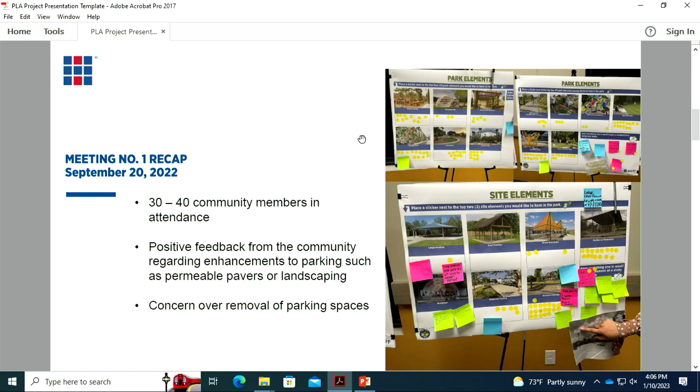The intent was for members of the community to come place a dot, which you see some of the yellow dots on those images, for the programming and the site elements that they favored the most. And we compiled all that information and included that into the concepts. So our first engagement meeting was September 20th. There was an overwhelming desire to maintain a lot of the existing parking that's out there at Stevenson Park. We also received some feedback in wanting to enhance that parking with permeable pavers potentially and landscape plantings. But definitely the overwhelming desire was to not remove parking.

The next meeting we had, Stephen, was October 25th. We had approximately 30 community members. Myself and Lewis on my team went to Friendswood High School and engaged them on what we do as planners and designers. We actually had some high school students come out and share their thoughts as well.

Some of the positive feedback we received from that presentation: outdoor dining, again parking is a premium, and improving the restroom facility as well. We also brought up some concerns over accessibility and ADA.

Our final public engagement meeting occurred November 29th. That was for us to compile all the input we had received and present the concepts. So if you could hit the slide for me, please. We compiled the information, all the input that we had received.

The top three desired amenities were enhanced parking, which received 36 votes, pavilion with restrooms received 27, and outdoor dining received 25. Additional amenities we noticed were covered parking for farmers market events and shaded parking areas.

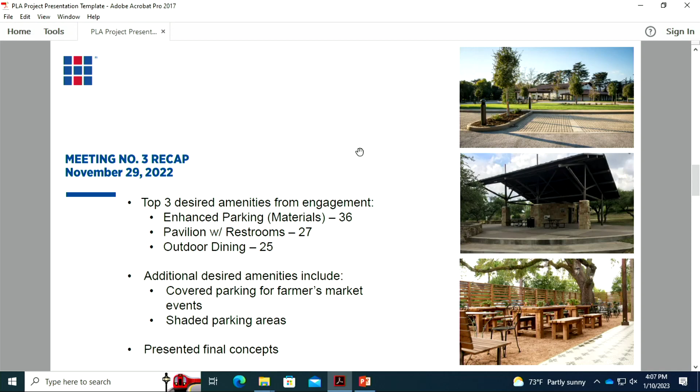During this meeting on November 29th, we presented the three concepts that our office developed, which we'll go into next. So we have concept A through C. A is the least intense of the three concepts, and it gradually gets more and more intense for the site.

A big goal of ours was to try to preserve as many of the parking spaces, but also add some semblance of park space. For this concept, we really view this as a gateway or a main entry into the park. You can see we've maintained a lot of the parking along the southern part of the site. We're proposing to replace the open ditch with a covered piped drainage and use that space for additional surface parking.

So as you enter from Friendswood Drive into the site, that area, noted by letter E, serves as a pedestrian drop-off, but also serves as a staging area for food trucks, because outdoor dining was listed as an amenity that people wanted to see.

The idea then is to have covered outdoor dining with shade structures. You can see from the pictures on the bottom left we're depicting what a shade structure might look like with some outdoor dining. Those large spheres represent pedestrian refuge safe areas—it'd be more of a bollard so that all of this could be at grade to address the ADA concerns.

In the center of that plaza space, we're introducing a water feature. The idea is to activate and energize that space, and provide a little bit of background noise. Behind the shade structures, we're proposing a bosque of trees, just a grove, and we're changing the paving to more of a crushed granite, which would be easier for outdoor dining if you have picnic tables.

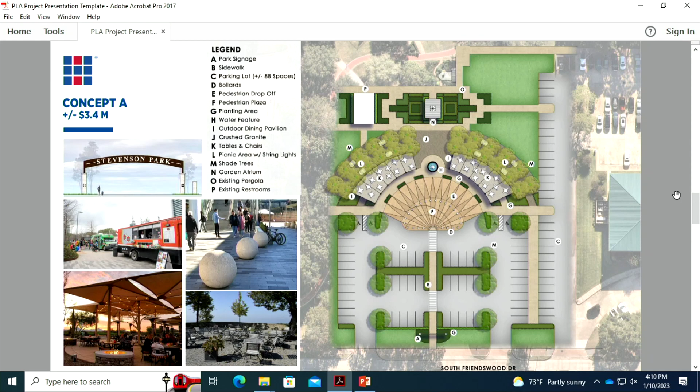Overall, we did a rough magnitude of cost. We think this is within the range of plus or minus 3.4 million in terms of construction costs. That did include a 20% contingency fee and 15% for professional design fees. I hit that pretty fast—it's been a while. Any questions?

What's the scale on these drawings? The scale is really kind of hard to tell—I believe it was like 20-ish scale when we printed it out. This is the one that provides the most parking though, with about 88 spaces. Off the top of my head I'm not entirely sure on the least parking option, but for the other two we put a plus or minus in the legend on the parking lot.

Yes sir. Would this replace the atrium? Would that replace the pollinator garden that's there now? No, it would add on to it. We're playing off of what's already there and trying to make that more of a feature. Okay.

So it creates kind of a photo op.

Did you consider having the drop-off area on the long side, between the City Hall building and this structure, where the new parking spaces are? It seems like that area would be very busy with pedestrians and parking, whereas the long drive between this and the City Hall building could be more conducive to getting cars in, dropping off, and out.

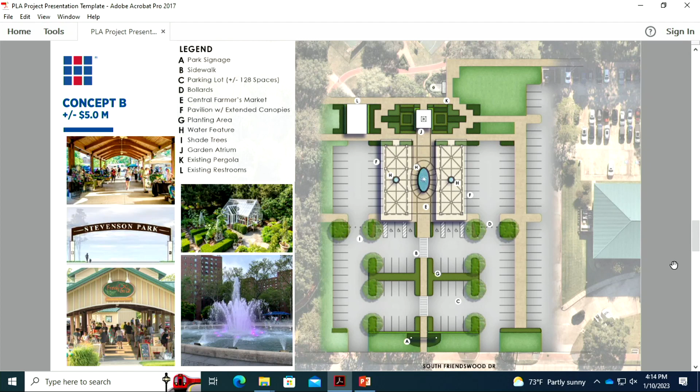Just a ballpark, compared to the other scheme, is the enlarged parking lot mostly responsible for the additional million or two, or is it these open air pavilion structures?

I can look back at our detail, but based off what I recall, I think it's the open air pavilion. Parking isn't as expensive.

What's the largest cost that goes into that? The largest cost is actually converting the open ditch, which was pretty significant, along with demolition and repaving. The pavilions overall, compared to the paving and site work, aren't as expensive as the concrete work.

Was that the biggest consideration with green parking, permeable surface? Yes. And how would that differ in cost from concrete? You're not going to save much—it's more about reducing the runoff and the aesthetics.

We'll see that in the final concept C. People do love that, but I'll be honest, it can become a maintenance concern. Pavers certainly start sinking at different rates, with concrete poured underneath instead of on it, and then grass starts growing above the pavers and mowers start scalping it. It sounds cool, but 10 years from now it won't look as good as the day you built it.

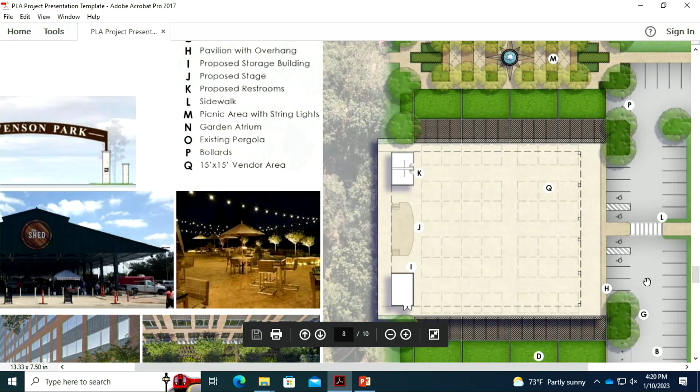Is the restroom new? The restroom would be new, yes sir. Those dashed lines represent potential vendor spaces, about 15 feet by 15, something like that. Yes sir. So the delineation shown is 15 by 15, but that's just open slab, so you could shape it any size you want. Absolutely, if you want to do 10 by 10, or play basketball in there, not that I need that, but you could do it.

It's all flat, yes, absolutely. The image to the left says 'the shed.' That's pretty much what we're envisioning: a very large open air structure that can house a variety of different types of programming.

Stephen, just for information, what's the date of the KFB meeting that this is going to be presented? James, to confirm, it's January 27th? I'm sorry, the 24th, January 24th.

Since he's here, hi, how are you? Welcome. Nothing like putting you on the spot. Oh, that's quite all right.

Now, are you anticipating KFB will come out with a choice for that evening? Yes, it is on their agenda to receive a presentation from Casey, as you guys just did, and then also vote on a recommendation on which of the three phases they'd like to see. Okay, that's what I wanted to know. Now, I'm going to make an editorial statement.

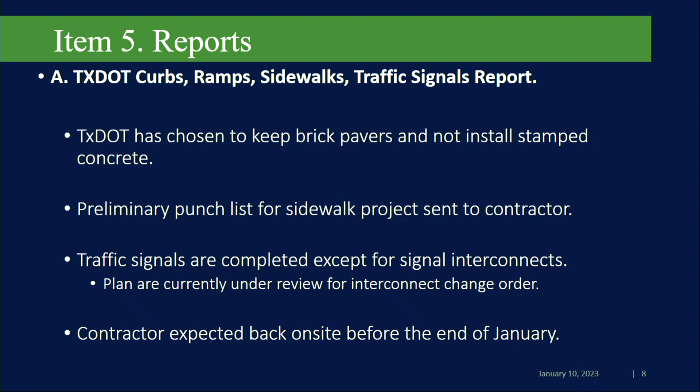There was some question previously, if you recall, back in October of whether or not some of the pavers would come out and be replaced with stamped concrete, red stamped concrete to look like brick. After consideration and some meetings with staff, they determined to keep the brick pavers currently in place and have the contractor fix any deficiencies that may be out there and continue that work.

TxDOT has provided a preliminary punch list for the project and sent that on to the contractor. The traffic signals, which is a different company than the one doing the pavers and curb ramps, I'll try to spell this out as easy as I possibly can. The signals are up and complete.

TxDOT requested that those signals be interconnected with some fiber network. In order to get that done, they had to make the request to the contractor. The contractor then has to put together a plan and send that plan back to TxDOT for review, for an approval of the change order. It is currently with TxDOT undergoing review. So as soon as it's complete, they'll turn loose the folks for the traffic signals.

Is that going to be overhead or underground interconnect? My understanding is that it's underground. Underground? I hope so. Yeah, we don't need any more kind of wires, that kind of kills what we're going after here.

And the good news is the contractor for the sidewalks, curb ramps, and pavers, they look to be back per TxDOT before the end of January. So we should see some work start to take back up before the end of the month.

Stephen, on the paver thing, was that driven by cost? No, sir. Initially, there were some areas of the pavers that had deficiencies where they had started to move or shift. When they did the preliminary walkthrough, they started having discussions on how best to address it. One of these methods is to just use stamped concrete, so it becomes leveled like any other concrete would. You stamp it, you color it to look like brick.

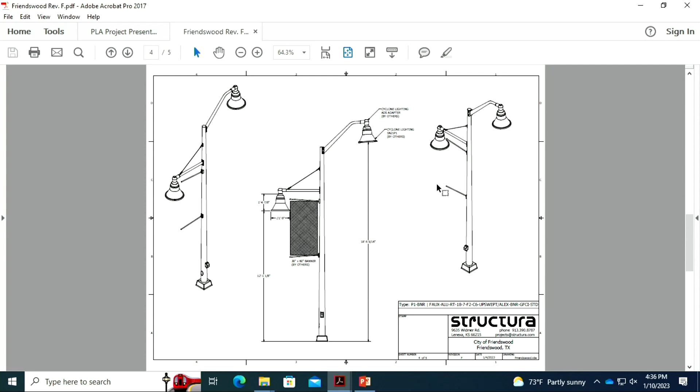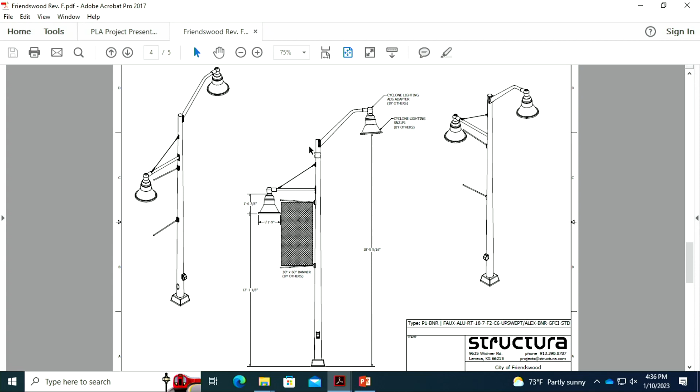This is the easiest way to depict what you would see. If you recall this portion here, this is the upswept arm. This used to very much mimic this kind of cantilevered option here. This is twofold: it eliminates some of the height of the pole to keep us out of conflict with the overhead power lines, but it also gives us this upsweep out into the street area where we can gain a little bit of height for our fixture. So we still have a light that extends over the street and provides that illumination, but we're no longer in conflict with the overhead power lines.

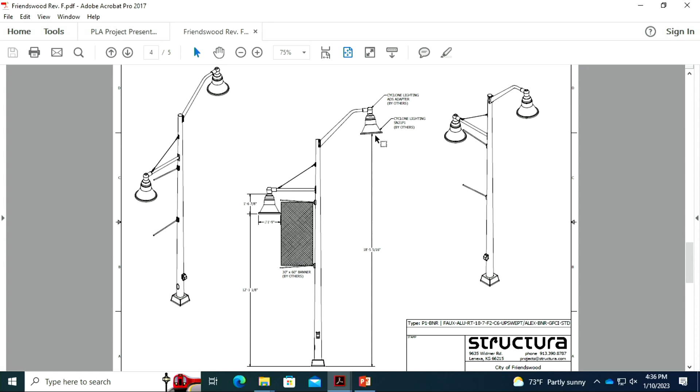The height of these poles has been decreased. The pole itself is, I believe, 18 feet, 5 5/16. And the cantilever takes that to about 20 feet tall out over the street. And then you would have your fixture, and that fixture hangs at anywhere between 17 and 18 feet. More than enough for vehicle traffic.

To eliminate any concerns or conflicts with traffic on FM 518, that is as opposed to the 32-foot that we were originally at. That's correct. And the 32-foot, even just with the cantilever out, by itself with that height got us into conflict significantly on the east side of FM 518.

The area that I believe is 10 feet that you have to be away from those power lines, it's very difficult for multiple reasons - either the placement of the pole per the original plan, or some of the limitations with some of the TNMP poles that have a little bit of a lean to them. So it was deemed the best option to get everything in place, keep it uniform, and illuminate both the street and the pedestrians.

All the way the same height, right? All the way the same height, yes, sir.